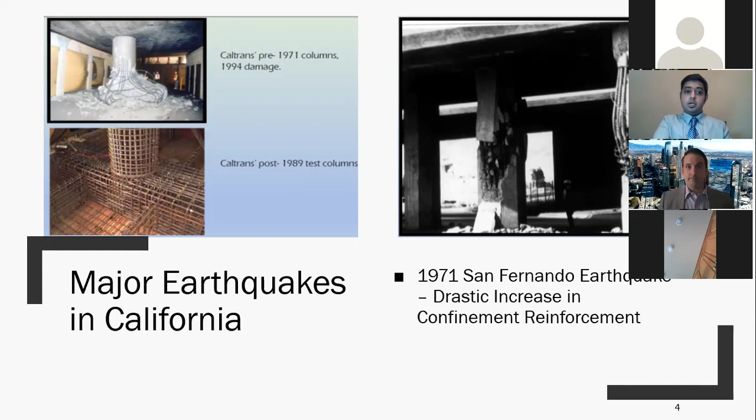The next major earthquake in California was the 1989 Loma Prieta earthquake, which resulted in the collapse of the Bay Bridge and Cypress Viaduct. The main issues brought into consideration during this earthquake were the support widths, especially the hinge support widths or at the abutments, and also better structural framing and continuity for multi-span bridges.

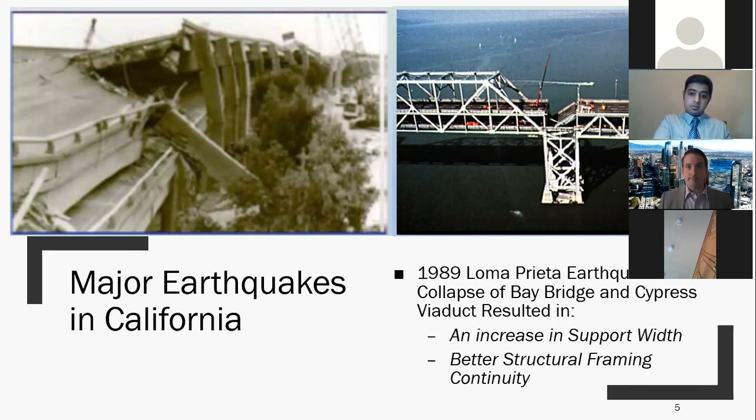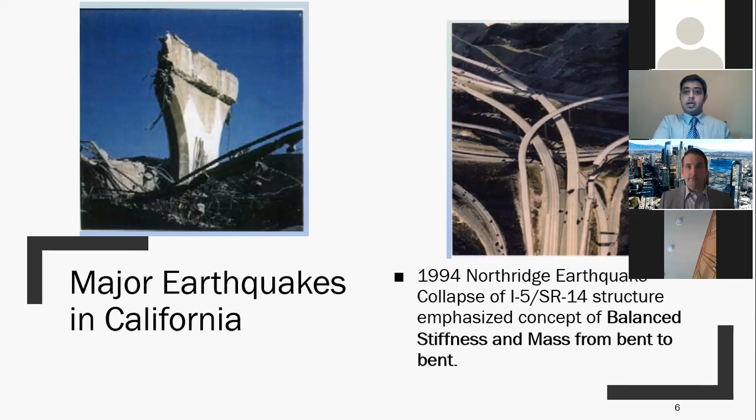Another major earthquake here in Los Angeles was the 1994 Northridge earthquake, which resulted in the collapse of the Route 5 and Route 14 interchange. This was the second time that this interchange had collapsed. I think it had also collapsed in the 1971 earthquake, and it again collapsed. It was reconstructed, and it again collapsed in 1994. This brought into our attention the importance of balanced stiffness and mass from bent to bent and from frame to frame, as you can see here in this picture.

This picture explains it more clearly. Basically, when we are designing new bridges nowadays, we need to balance the stiffness between the columns, adjacent columns within the bent, and adjacent bents within the frame. This is an extremely important point which we learned from the 1994 earthquake.

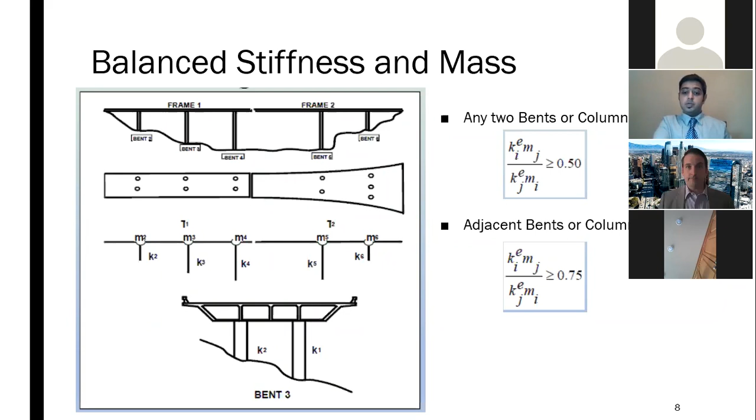So what is Caltrans' Seismic Retrofit Program? This is an ongoing program, and each earthquake has taught us something new. At Caltrans, we have tried to incorporate those things into our bridge design.

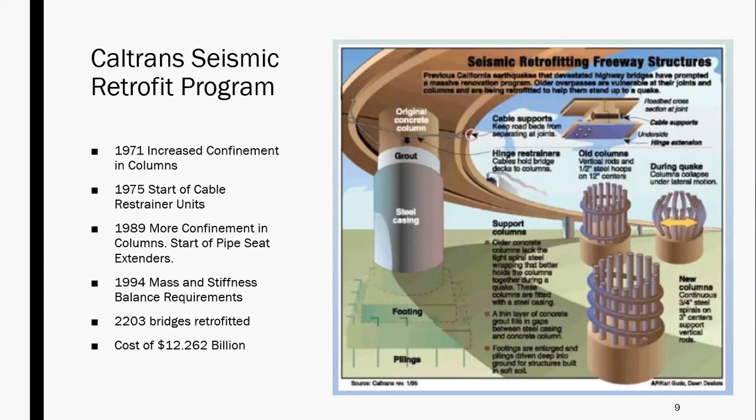So in 1971, we started providing more confinement. In 1975, we started using cable restrainer units. Then in 1989, we again started providing more confinement and using pipe seat extenders. Also, the seat widths, the criteria for at least minimum 24-inch seat widths, came into picture. The '94 earthquake taught us about mass and stiffness balance between adjacent columns and frames for continuous bridges.

Approximately 2,000 bridges have been retrofitted in the past at a cost of $12.262 billion, which is a huge amount. When we are driving on the freeway, we don't really realize how many bridges we cross, especially here in LA, where we have to commute so much.

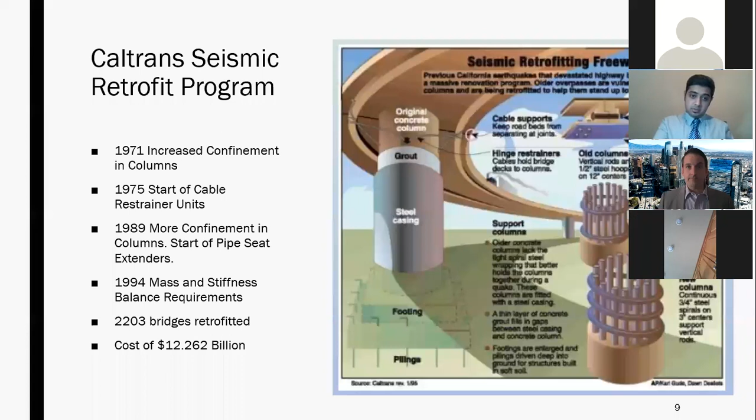Then what is the need for seismic retrofitting? Why are we still seismically retrofitting the bridges? The first and important thing is that past earthquakes dictate the need for seismic retrofitting, like how bridges have performed in the past. Maybe some elements got damaged, so that's why we need to fix them.

Secondly, I think after the 1989 earthquake, during phase one and phase two retrofit programs, more than 2,000 bridges were retrofitted, including single column bent bridges and multi-column bent bridges. Every year we additionally retrofit around 30 plus or minus bridges through widenings and new screenings.

So the reason why we need to retrofit is because our standards are constantly evolving, and as we move forward, we need to make sure that the existing structures, as they are aging, are capable of handling the loads from an earthquake.

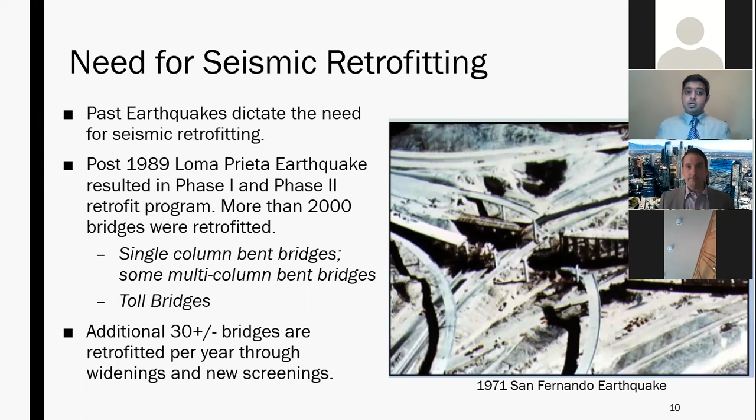Some of the challenges in seismic retrofit programs or projects is the need to identify the design scope early on. Usually in normal projects, we identify the exact scope when we go into the actual design phase. But for seismic retrofit projects, we need to define the scope well before the actual project starts so that we have the allocated funding for the work we need to perform.

Then widening of existing bridges again poses a challenge because now, based on the new memos to designers, I think 20-15, we need to check if the existing bridge is capable of handling all the seismic forces on its own before we widen that bridge, which is something new that Caltrans has introduced.

Seismic hazard maps are constantly changing. USGS is updating the maps, and the trend is moving towards new modern seismic hazard maps. So because of that, maybe some areas which were not seismically severe are now becoming more seismically active.

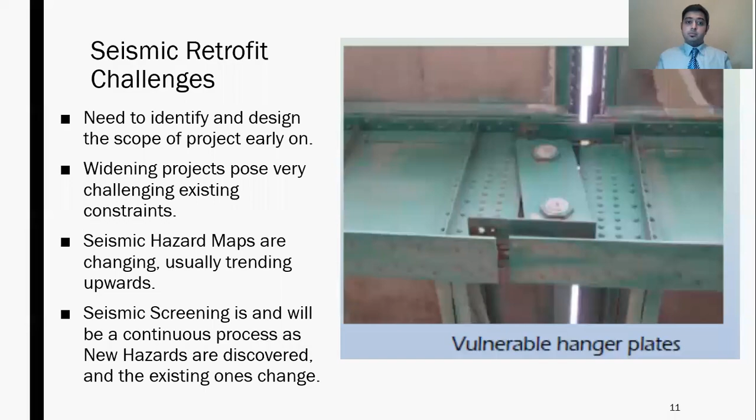So we need to constantly rescreen the bridges in California and identify which bridge needs to be retrofitted. So how do we screen the bridges for seismic retrofitting here at Caltrans? These are some of the list of items which we consider.

The first is if the bridge has the potential for liquefaction and lateral spreading - if the soil, the foundation, will be affected by liquefaction.

Then second, seat widths and cable restrainers. In the past, even though cable restrainers are effective, if they are grouted, they become extremely non-effective - only effective like 10%. So that's a major concern which was brought into our attention.

Then bridges which are crossing active faults, bridges which have increased ground shaking hazards due to updated USGS maps and information, then improvements in seismology, seismic analysis techniques, and bridge retrofit needs, then bridge vulnerabilities not addressed in the previous programs.

For this screening, which happened a couple of years back, initially I think 13,000 bridges were screened, and out of 13,000, approximately 500 structures were identified to be potentially vulnerable to hazards and structural vulnerabilities under an earthquake.

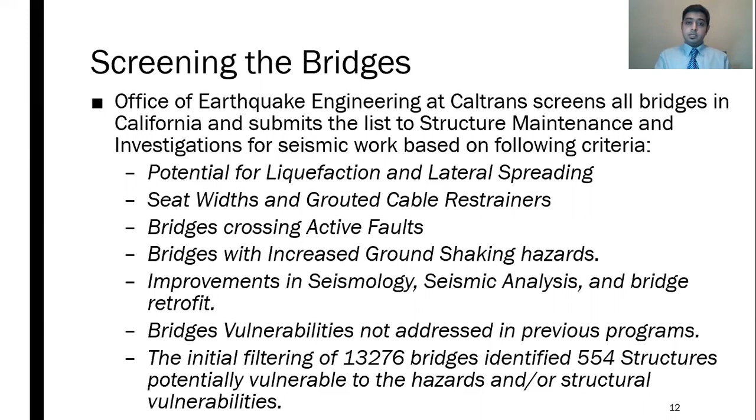Now coming to the actual retrofit part, how do we actually retrofit the bridges? There are multiple ways, and it is also unique to a bridge - how old the bridge is, the as-built plans. There are so many factors which dictate what retrofit strategy you are going to use.

It's a team of engineers working together to come up with the right strategy for retrofitting. It's not just one person's opinion - geotech engineers, earthquake engineers, hydraulics, then district engineers, roadway maintenance engineers. A team of maybe around 20 to 50 people approximately, depending on the scope of the project and how many bridges are involved, will work together to come up with the retrofit strategy.

The main principles which we do in retrofitting the bridges is to reduce mass, then reduce substructure - to retrofit by substructure replacement or additions like adding new foundations, then separating the mass. Column encasing is common, hinge modification like installing cable restrainers or pipe seat extenders, then doing interim retrofits - until a new bridge is constructed, doing a temporary retrofit or retrofit by replacement.

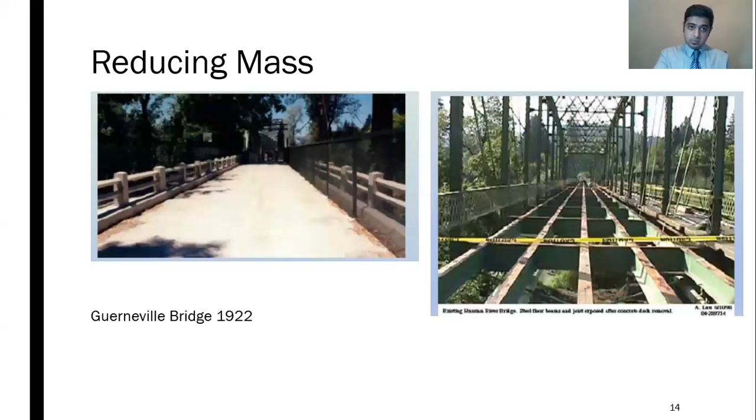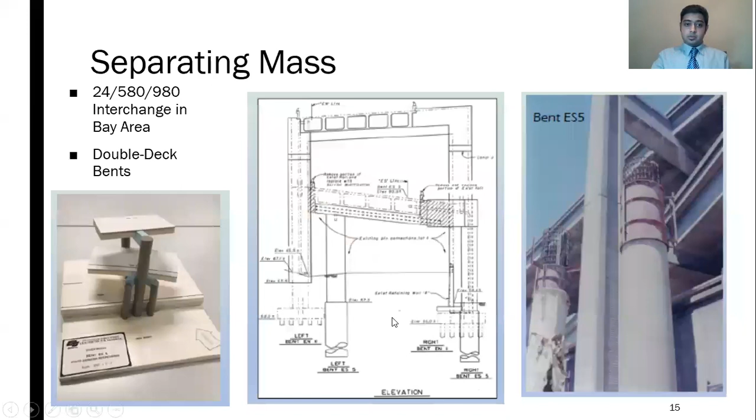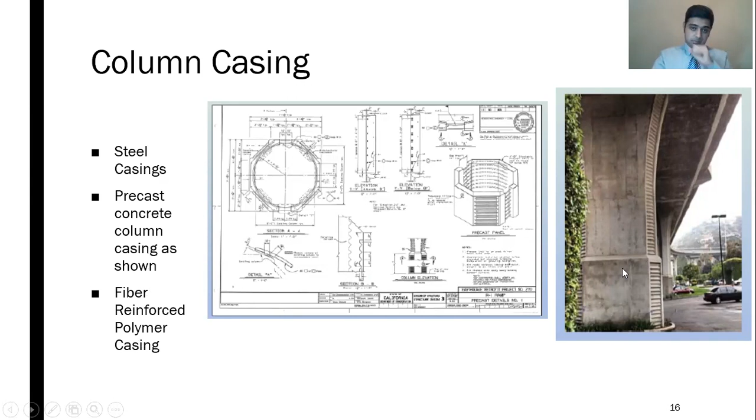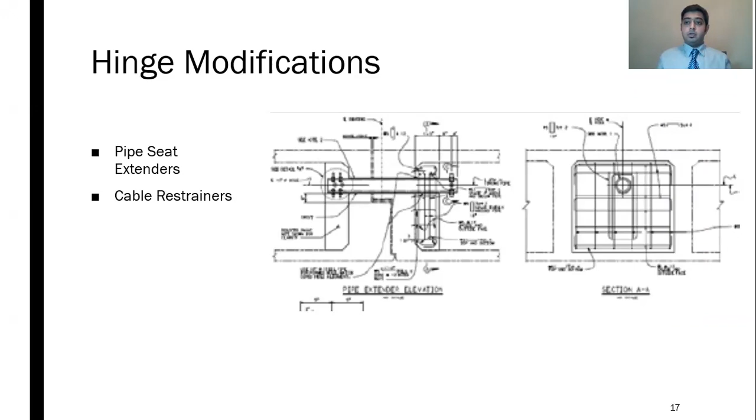So that was a general introduction on what we do for seismic retrofit, the basic seismic retrofit strategies. I'll talk about the projects I'm working on, the bridges I'm currently working on as a bridge engineer doing seismic retrofit.

One thing we look at when doing seismic retrofit is that we need to make sure the demands on the bridge, the displacement demands, are less than the capacities. This means the main principle is to increase the capacity of the bridge elements, and as I shared with you, that can be done by any of these techniques. So we want to increase the capacities and try to reduce the demands.

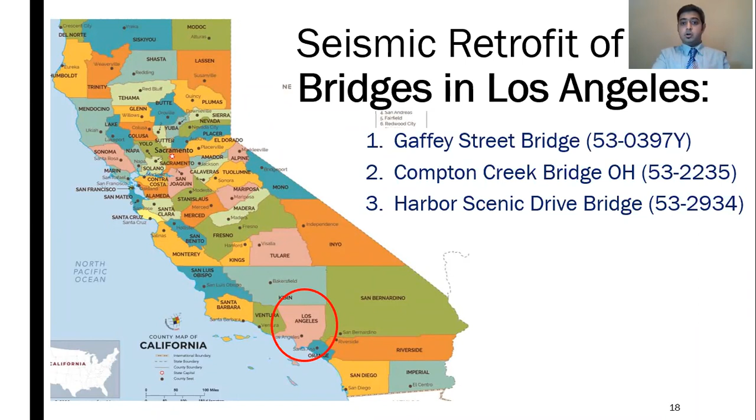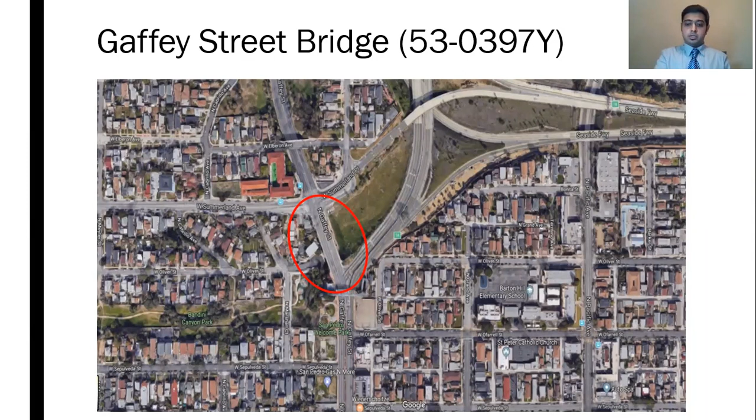First I'll talk about the Gaffey Street Bridge. Maybe many of you have driven on it. This is an old structure—I don't know if you've noticed it. It's located by San Pedro, where we exit off 110 and turn onto Gaffey Street, at the first intersection by the San Pedro sign. This is the first bridge, as you can see in this picture.

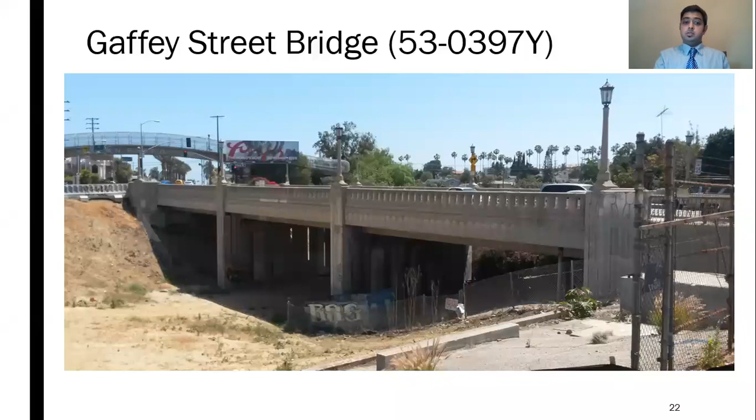This bridge is extremely old—it was built in 1935, and it has been designated a historic bridge. That's why it's extremely critical to retrofit this bridge, and also important not to change its appearance because it is a historic bridge.

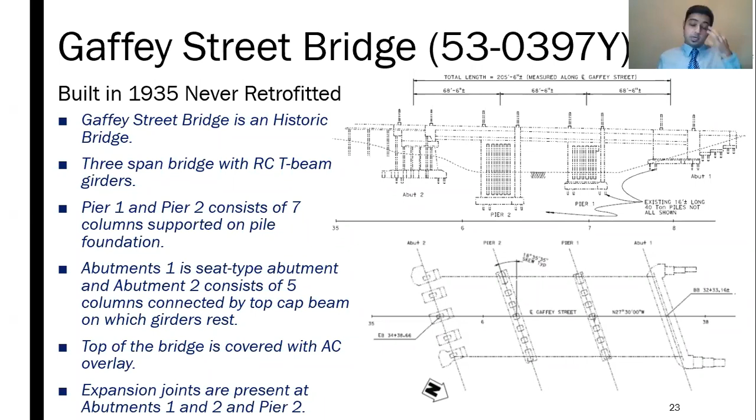In terms of geology and foundation, this bridge is located in a pretty decent soil condition, so it did not have any liquefaction or lateral spreading potential—that was a good thing. The other thing was that the foundation piles were only 40-ton piles, so 40 ton is like 80 kips capacity. And the wing walls are supported on wooden piles with only 20-ton capacity.

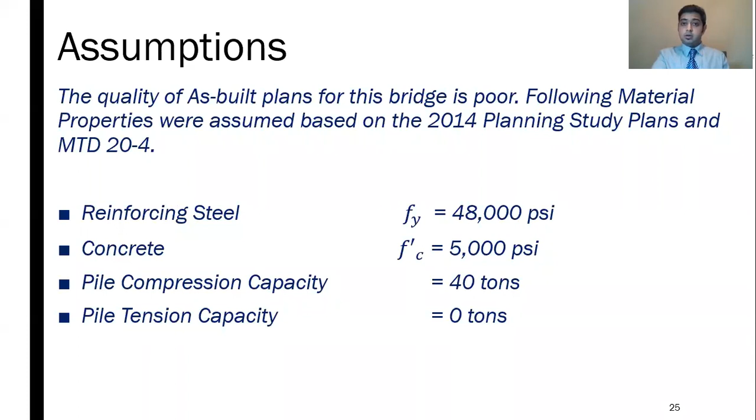The main material properties used for analysis, based on our Caltrans Memos to Designer 20-4 guidelines, are: reinforcing steel Fy equal to 48,000 psi, concrete around 5,000 psi, and the compression capacity of the piles is 40 ton. The tensile capacity of these piles is 0—they cannot handle any tension because these piles are only about 16 feet in length, so they are not deeply embedded in the ground.

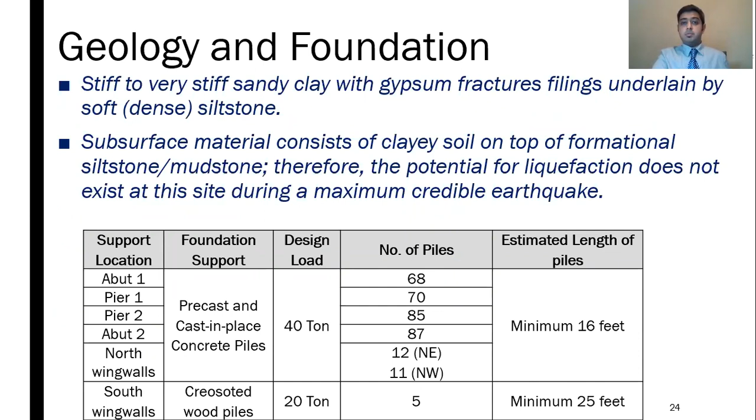So I created a CSI Bridge model. I'm sure a lot of bridge engineers here use CSI Bridge. It is very interesting to play with, and the unique things in creating this model was creating the simply supported spans and creating the expansion joints at Pier 2, which was kind of unique, by using a gap element. So using this model, I performed response spectrum analysis to get the displacement demands.

Based on the SDC 2.0 criteria, I calculated the capacities for these pier columns. We had to make some assumptions in order to model this bridge, because the piers are not exactly a pure wall since they have openings in between. So I modeled it as individual columns.

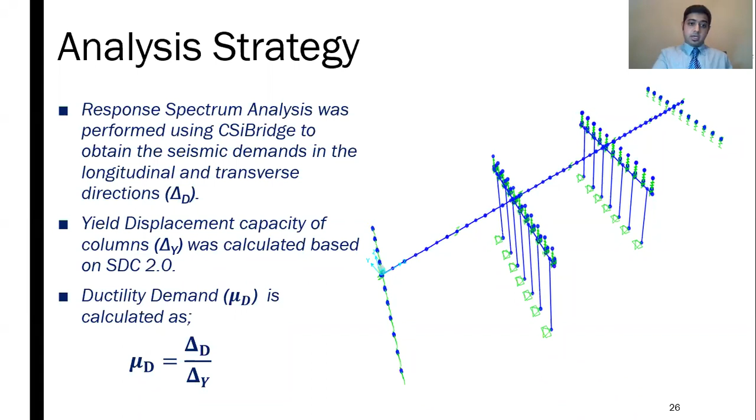So the ductility demand here was calculated as displacement demand over yield displacement capacity. This ductility demand is compared with this chart from Memo to Designer 20-4. In Caltrans, they did a lot of research with universities, and based on their findings, they came up with this table, which tells you what is the maximum allowable ductility capacity, mu C max.

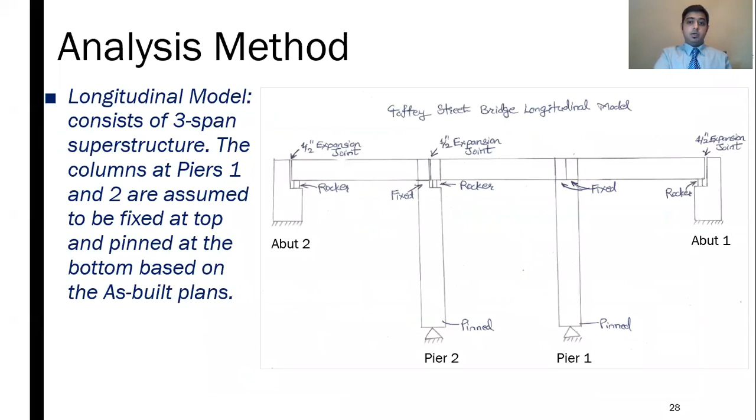So our mu D has to be less than mu C max. In that case, you don't need any seismic retrofit. Well, I'll talk about my results further. This is the longitudinal model, as I explained earlier, where we have an expansion joint in the middle, and this is the transverse model.

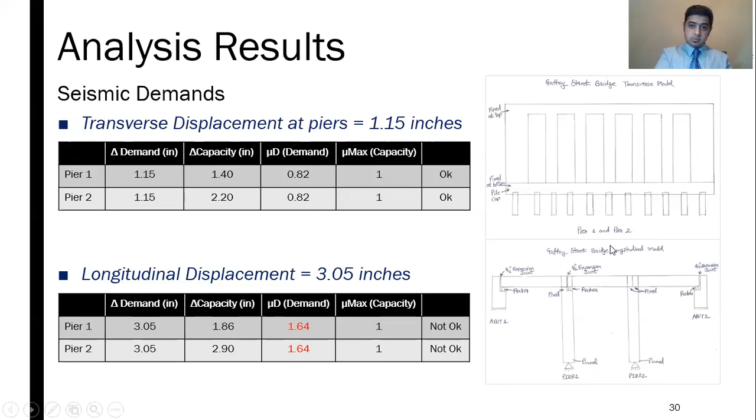Another thing I forgot to mention about this bridge was the quality of the as-built plans. Since this bridge was constructed in 1935, the quality of the as-built plans is very poor. So it was a challenge to identify what type of reinforcement has gone into it, what are the dimensions of the piers. It was extremely challenging and also interesting.

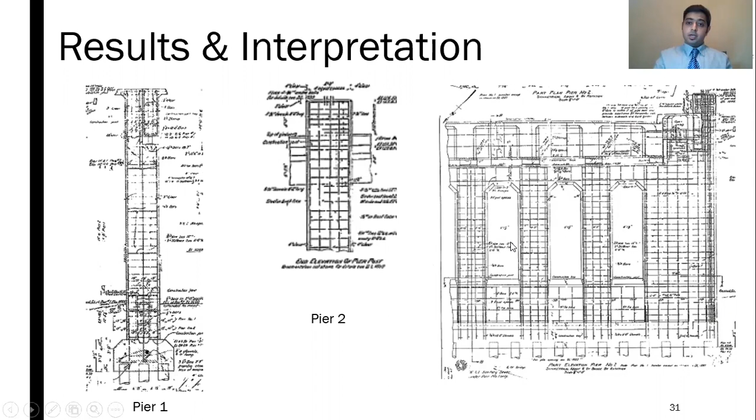Since this is an older bridge, these days we do not allow any longitudinal splicing, but there is some splicing here at the bottom of these piers. I don't know if you can see here in this drawing, but these vertical rebars are spliced, and again the confining reinforcement is also very negligible. Like number 4 is at 18 inches.

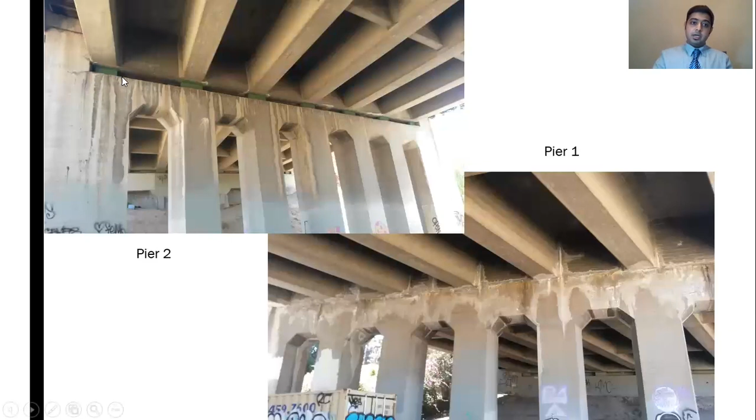This is the picture of the pier walls. You can see that it has 1 foot tall rocker bearings at the middle pier. These are the piles which I mentioned earlier during my presentation.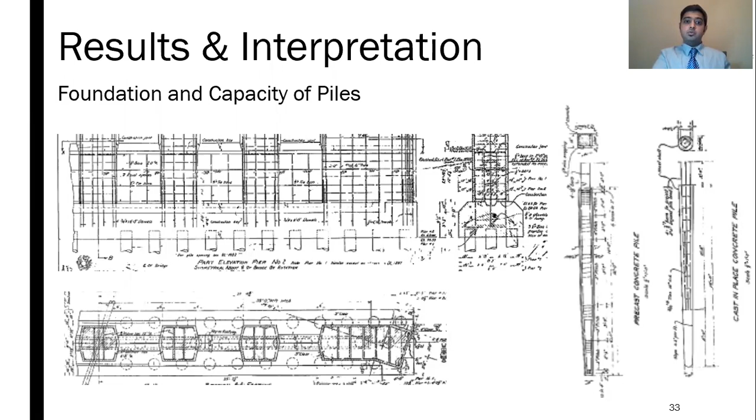Given the geometry of the pier walls, it is extremely difficult to install the steel casing, so we had to come up with a different type of strategy to confine the columns. We decided to install fiber reinforced polymer casing, and we are also going to install carbon fiber anchors to hold this casing in place.

Initially, we were also planning on installing the casing on the outer columns, but since this is a historic bridge, these outer columns have architectural treatments, and it was not allowed to change the look of the bridge. So after doing exhaustive calculations, we were able to determine that just providing the casing on the interior columns, we can still strengthen the bridge and prevent it from collapse.

The main idea behind seismic retrofit is preventing the collapse mechanism from forming, that is preventing plastic hinging from forming. Luckily, the PGA at this site is not that great. It is around 0.58, so it's not a very high ground motion susceptible site.

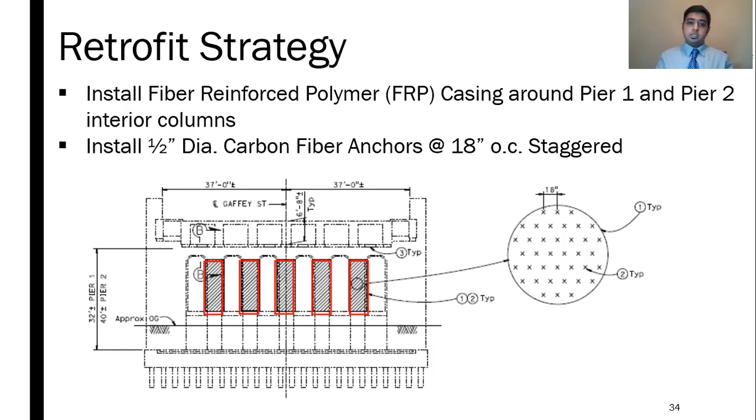Another important aspect we had to consider in our retrofit strategy was the 1 foot tall rocker bearings. 1 foot is a pretty considerable amount of thickness, so in case of longitudinal movement of the bridge, chances are that the spans are going to get unseated from the rocker bearings. So another alternative was to construct catcher blocks, so even if the spans slide on the rocker bearing, they will fall on these catcher blocks instead of falling 1 foot, which would create huge damage.

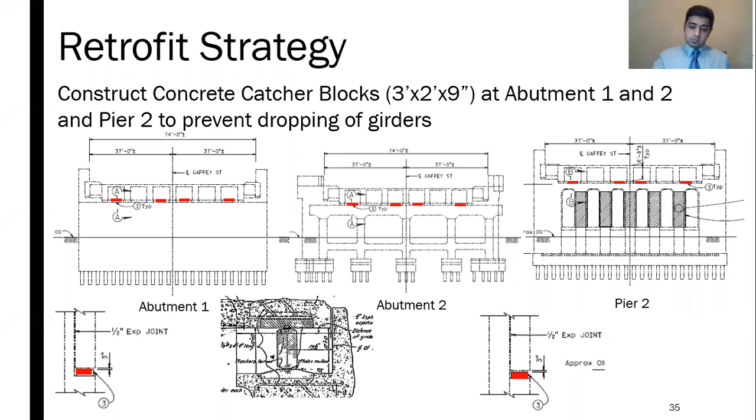So after doing all this analysis and brainstorming what retrofit ideas we are going to do, everything comes down to a price, how much it is going to cost. The approximate cost which we calculated was around $800,000. This project is still ongoing and we are still going on with the final design, so this cost may change.

But the main thing is we want to do the bare minimum possible work to get maximum output, or maximum outcome, out of our retrofitting. That's the main strategy we implement in seismic retrofitting.

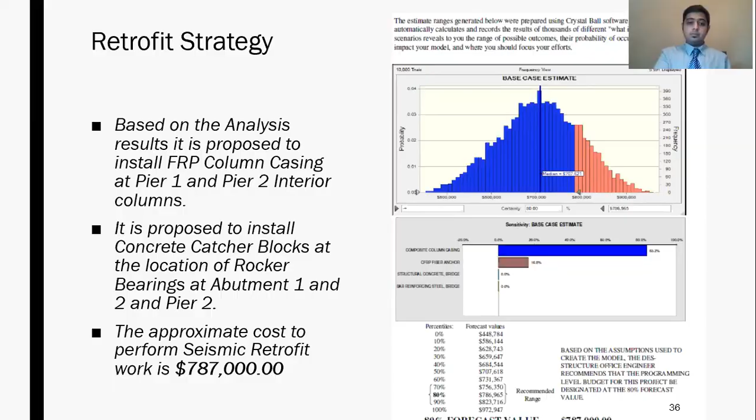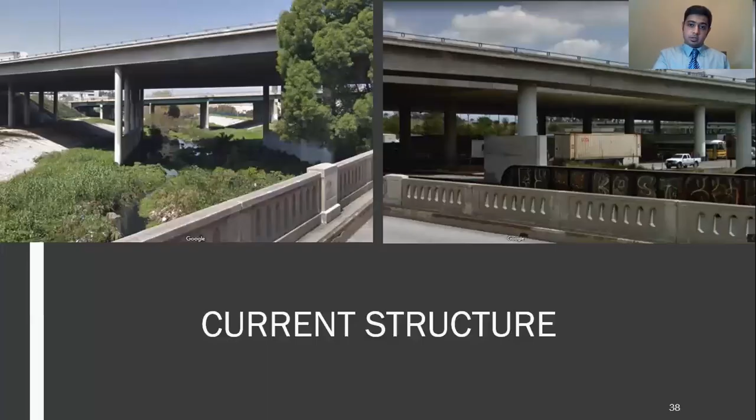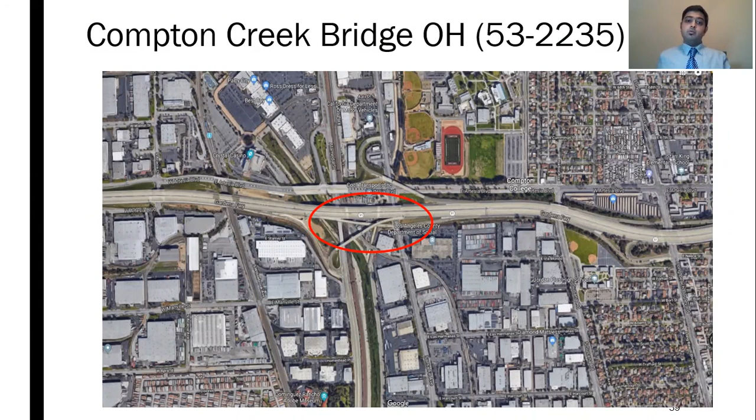So the next bridge I'll talk about is Compton Creek Bridge overhead. All three bridges I'm talking about are part of a single project. This bridge is located on Route 91, and it's a multi-span bridge, pretty long, with Compton Creek passing underneath it, which presents unique challenges.

To give some background, this bridge was built in 1974 and was originally retrofitted in 1996. But as I explained earlier, we've come up with new screening criteria, and this bridge was re-screened by the Office of Earthquake Engineering for seismic retrofitting, so I reanalyzed this bridge.

This bridge consists of a left and right bridge. If you look at the picture, you won't notice it, but the left and right sides are actually separate, divided by a longitudinal joint. These days we don't use longitudinal joints because they become a maintenance issue, but since it was built in '74, it has one.

It's an 11-span bridge on the left side and 10 spans on the right side. The last two spans are pre-stressed concrete, and the remaining spans are cast-in-place reinforced concrete. In 1996, they retrofitted all the bents except bent 2, 3, and bent 4.

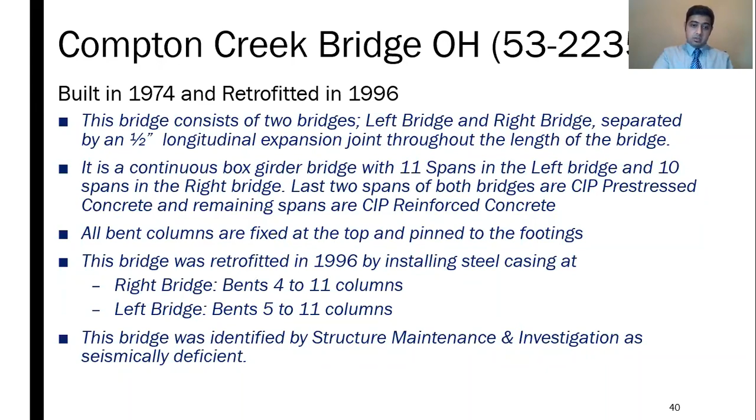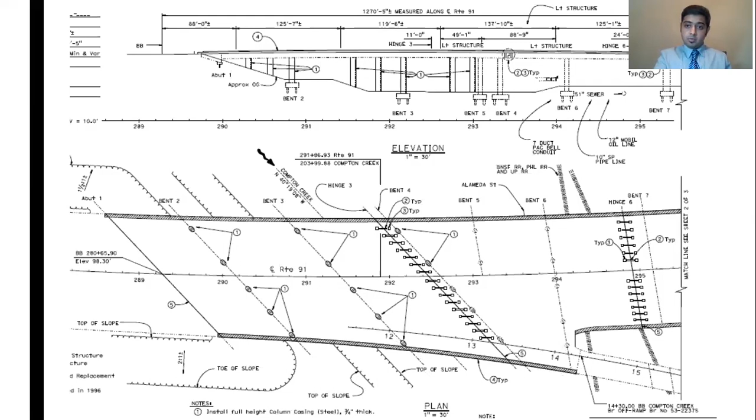Another thing is that this bridge branches off, and there's another bridge which connects to the main bridge at bent 6 - the off-ramp bridge, which branches off from it. Up until bent 6, this off-ramp bridge is also supported by the main structure. There were a lot of complications in modeling this. And there's another on-ramp bridge which joins this bridge at bent 11.

Geology and foundation-wise, this site mainly consists of medium dense silty sand. Originally, this bridge was found to have a potential for liquefaction and lateral spreading. So we did in-depth geotechnical investigations, and based on current standards, Geotech did the liquefaction and lateral spreading analysis, concluding the potential is negligible, so we don't need to retrofit the foundation for that. It took almost a year just to do the geotechnical investigations and analyses.

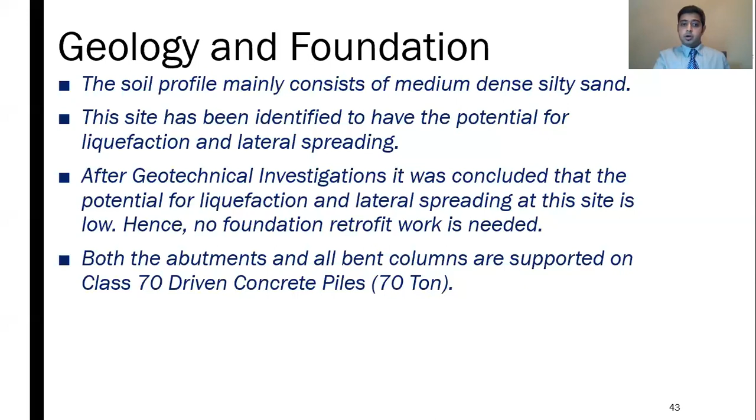Both the abutments and all the bent columns are supported on class 70 driven concrete piles - that's 70 ton, or 140 kips. Regarding material properties, since this is a newer bridge compared to the Gaffey Street bridge, the steel in the existing structure has a yield strength of 66 ksi, and the concrete is 5,000 psi. All the columns are fixed at top and pinned at bottom.

In order to analyze this bridge, I modeled it using CSI Bridge. Along this blue central line, I had to place an expansion gap element to allow for the expansion joint between each bent. That was very intricate and challenging to do, and it took me some time to generate this model.

It's extremely important to have a realistic model of the bridge, because any errors in the model may cause you to underestimate or overestimate the bridge's capacities. At Caltrans, it's extremely important for us to have an accurate model, and we support it with independent checks and hand calculations to get a good idea about our model rather than just relying on the computer.

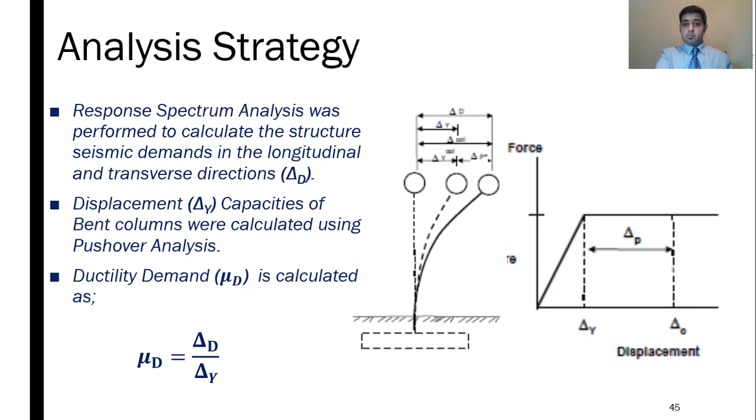To calculate the capacities, we had to do a pushover analysis on each bent. We did pushover analyses on all 10 bents, and there are 4 frames, so we had to do pushover on each frame in the longitudinal direction. There were multiple pushovers to calculate the capacities.

Again, the criteria was to compare the ductility demand with the allowable ductility capacity, that is 3 in this case, because these columns are much better than what I showed you for Gaffey Street.

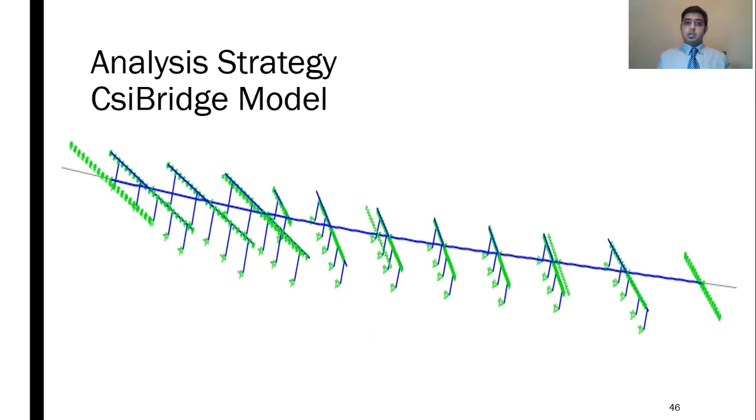Based on my analysis, I found that hinge 3 and hinge 6 have demands of around 20 inches, and the hinge seat widths are only 15 inches wide. This means that in case of an earthquake, if these 2 frames move in the opposite direction, they are likely to separate, and the frame sitting on the other frame is going to fall off. So the strategy was to install pipe seat extenders at hinge 3 and hinge 6.

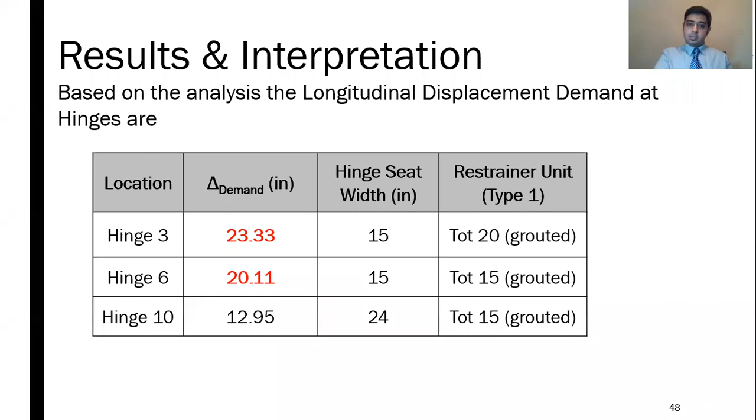Hinge 10 was good - the demand was less than the hinge seat width, so we didn't have to do anything there. You can see these are the old hinge details for hinge 3 and 6, with 7 inches and 8 inches of hinge seat, and this other hinge is around 24 inches, 2 feet wide.

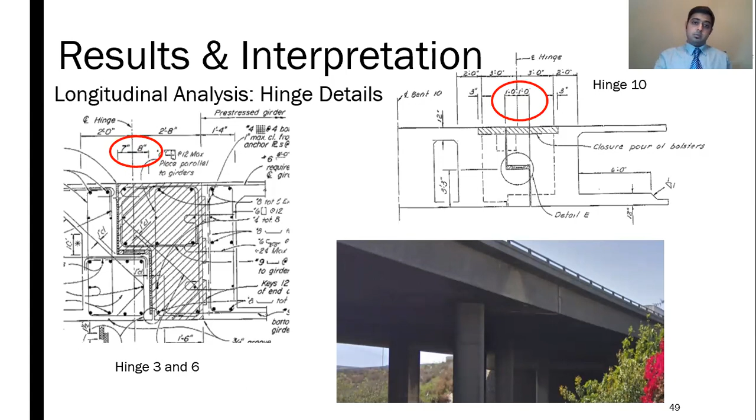Nowadays, when we construct new bridges, the minimum hinge seat criteria is 30 inches based on SDC 2.0, and SDC 1.7 had a criteria of, I believe, 24 inches. That's not the ultimate criteria, just the minimum. The hinge seats are also dictated by how much longitudinal displacement you anticipate at your structure, plus thermal movements and any shrinkage or pre-stressing effects. All these things come into picture when we calculate hinge seat widths based on our current standards.

So the retrofit strategy is to install pipe seat extenders. Installing pipe seat extenders is extremely challenging because you have to go from underneath - I'll go on to the next slide - you have to basically go to the location where the hinge is.

In this case, we have a railroad right above, right below our hinge location. So you have to create soffit openings from both sides to go inside the cell and then put in this pipe - drill across the hinge avoiding any reinforcement - and then construct bolsters at both ends to secure the pipes properly. It's a very cumbersome job, but it needs to be done to ensure this bridge is safe.

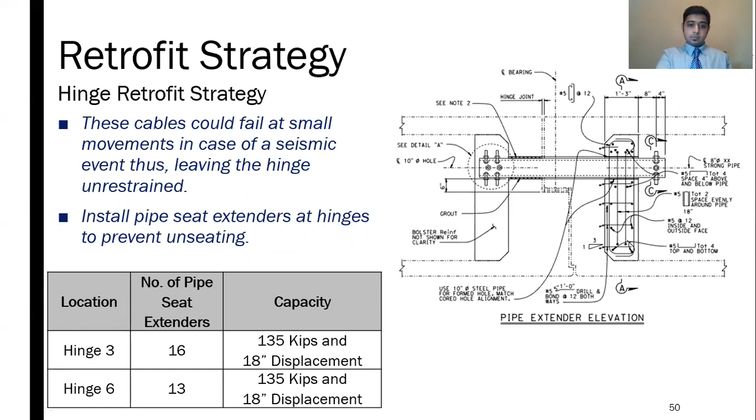The second thing was, earlier I mentioned we also did pushover analyses on our bridge bents. Based on the pushover analysis, it was found that bent 2, bent 3, and bent 4, which were not retrofitted in the past, had demands greater than the capacities, which means they needed to be retrofitted.

I'm not sure why they did not retrofit these bents - maybe because of the creek which was present here in the past. But it clearly indicated that we had to retrofit these bents based on our analysis results.

So it was proposed to install a regular standard steel casing. Installing steel casing bumps up the allowable capacity values to 8 instead of 3 without any casing. This gives the columns more ductility - in case of a strong earthquake, they will displace more, the plastic hinging will be delayed, and that gives them more capacity.

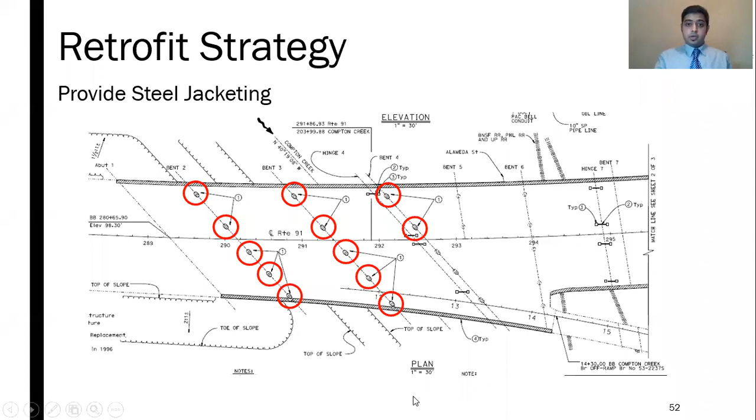So you can see here, these are the bent columns which we are going to retrofit by installing column casing. Another unique thing is these two bents are within the Compton Creek area.

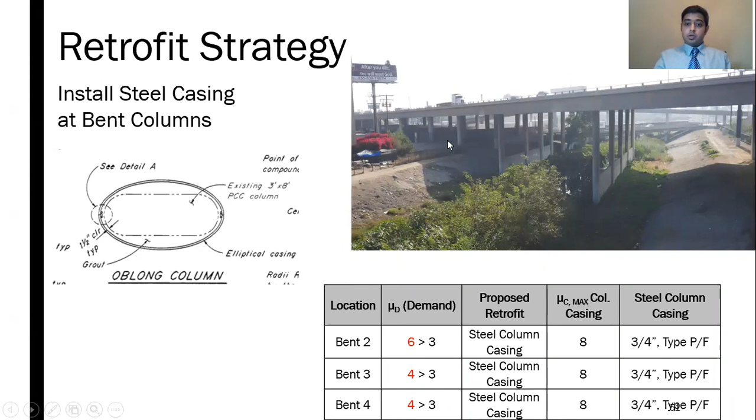We have to excavate, do some water diversion, get permits from the concerned parties, and for installing the pipe seat extenders, we have to work with railroad companies. This is a typical section view of how the column casings are going to be installed.

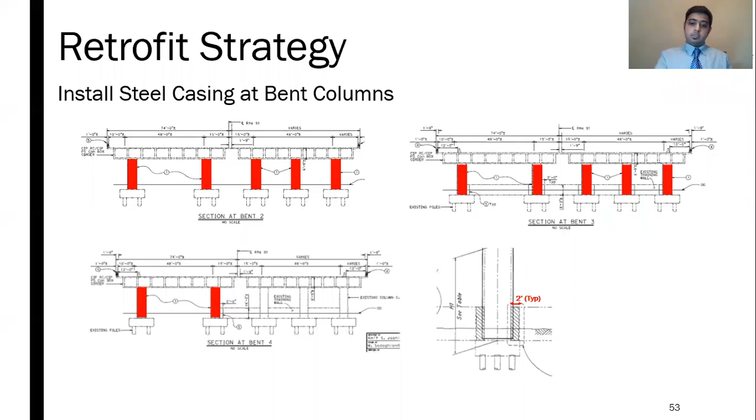The cost for this project is significantly higher because this bridge itself is huge, and the amount of work we are doing is enormous. So it's around 4.8 million. This may change because we are still in the actual design phase, and as we move on it will definitely change a little bit, not drastically, but it will be interesting to know.

It becomes a huge challenge to work above any water bodies. We need to get so many permits and we have to prevent debris from falling inside.

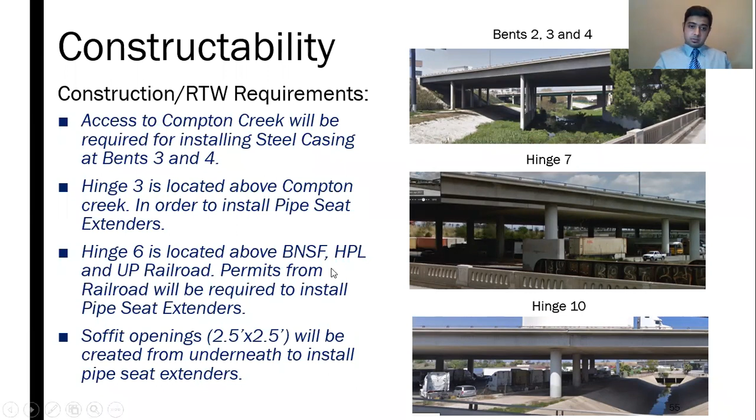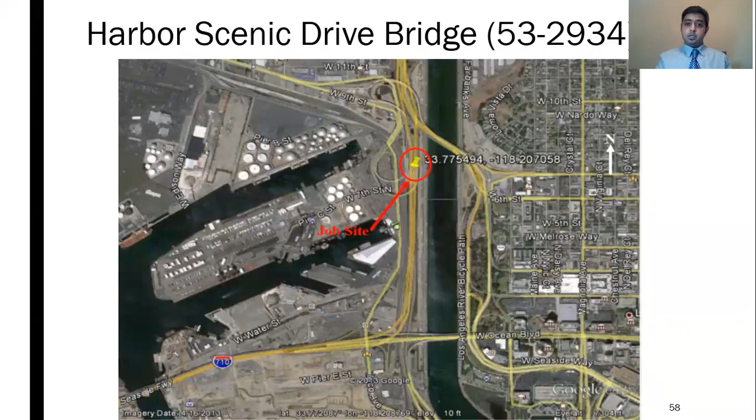The third bridge which I'm working on is Harbor Scenic Drive Bridge. This bridge is also very interesting structurally, and I'll share with you guys shortly. This is located around the Long Beach port area, and this area has soil which is prone to liquefaction and lateral spreading. So we had to do a lot of geotechnical investigations here.

Originally this bridge belonged to, I think, Port of Long Beach, and it was relinquished to Caltrans probably sometime in the 80s or early 90s. They had retrofitted this bridge in 94 by installing partial height casings and full height casings, and the foundations of some of the columns were retrofitted by installing a top reinforcement mat for 16 columns.

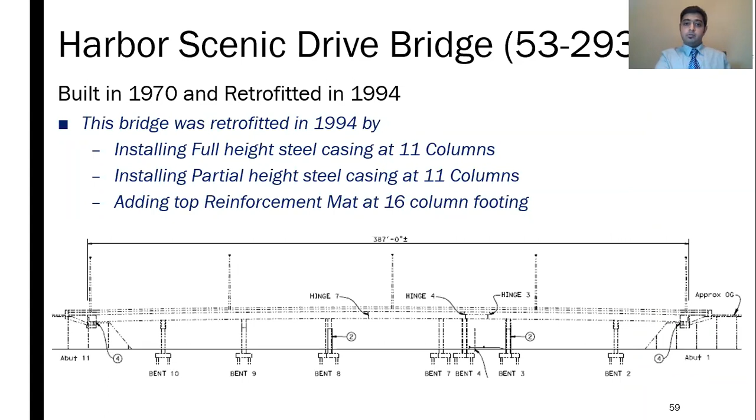The soil mainly consists of soft silt with interbeds of clay, and as I mentioned, this had a potential for liquefaction. Geotechnical investigations took almost a year. After the investigations and lateral spreading analysis and liquefaction analysis, a team of engineers decided that the potential exists but is negligible, and it won't significantly damage the bridge.

So the piles are embedded deep enough, they penetrate below the liquefiable layers of soil, which was a good thing, and they would still retain enough capacity.

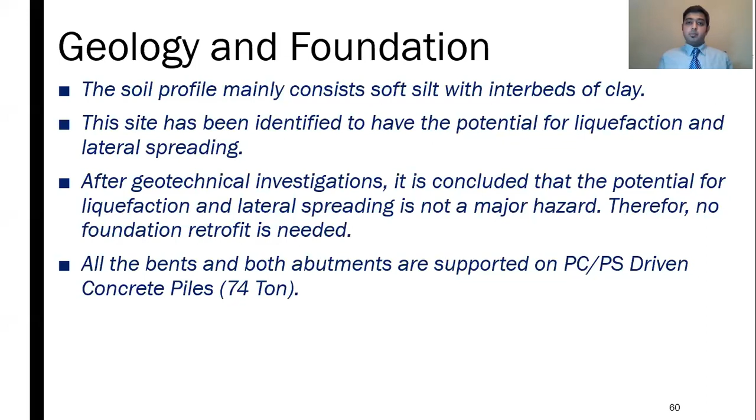Again, the material properties which we used for this bridge are 48,000 psi, and concrete is 4500 psi. All columns at bents are fixed at top and pinned at bottom, and a plastic hinge is expected to be formed at the top of the column.

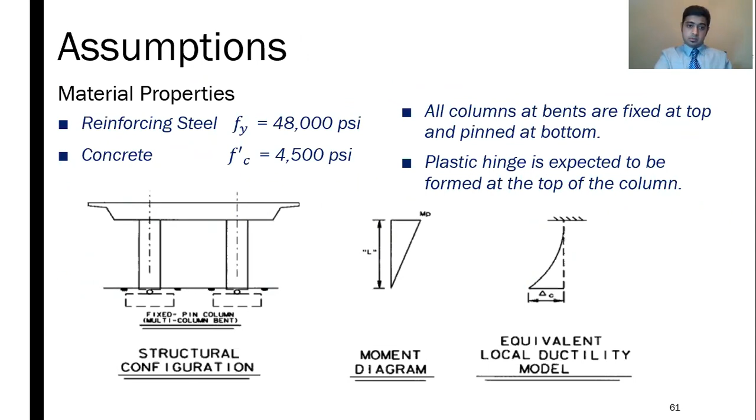To model this thing in CSI Bridge was extremely challenging. The main thing was we actually generated an Excel file with all the coordinates of each bridge column, and that's how we modeled it, not by using the direct interface which CSI Bridge offers. We had to go the back route where we change the coordinates and put the elements and everything in an Excel file and then extract our model. This was an interesting task to do.

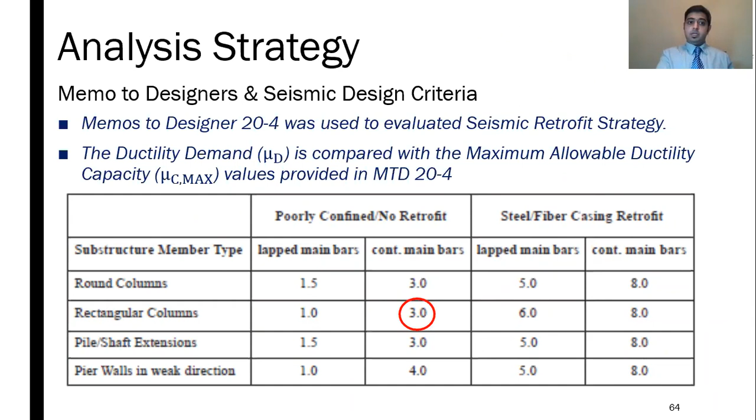At hinge 8, they had previously retrofitted by installing strong pipes, basically pipe seat extenders, with an allowable displacement of around 8 inches, while our demand was around 12 inches. So it was decided that it's reasonable - even in the worst case, these pipes won't completely break off, though the end plates may break off. So it was decided we don't have to do any hinge retrofit there, given that the original retrofit in place is acting pretty good.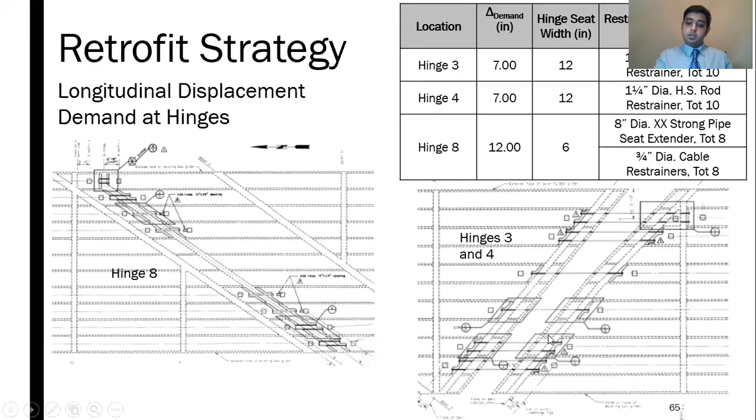This was not just done by me, but by a team of engineers. I was the main project engineer, and a team of other engineers helped me do this analysis. Each model, or each bridge strategy, is independently checked by another engineer to make sure that person hasn't missed anything. Especially in this kind of complex bridge, it is extremely important that we consider that.

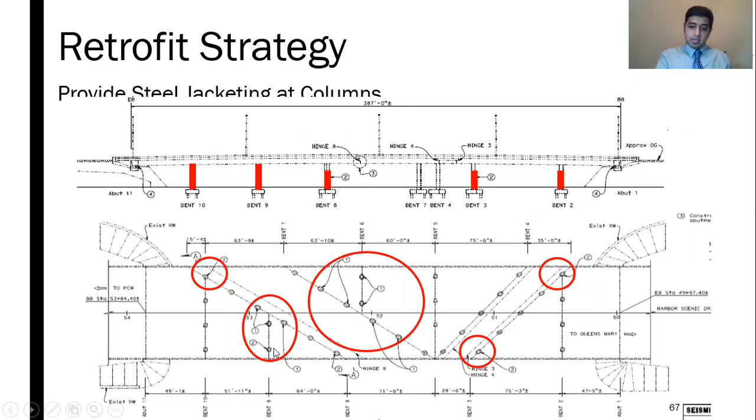At the end, it was decided to provide steel casing. Some of the columns were already partially encased - I don't think you can see it from here - and some columns were fully encased, and some were not encased at all. So here you can see these are the columns which were partially encased, and these are the columns which were fully encased.

In our strategy, we decided based on our results to encase some of these columns which were not retrofitted in the past. We don't really do partial column encasing - I'm not sure what the idea was when they did this, because this wasn't done by Caltrans. It was done, I believe, by LA County or LA City back then.

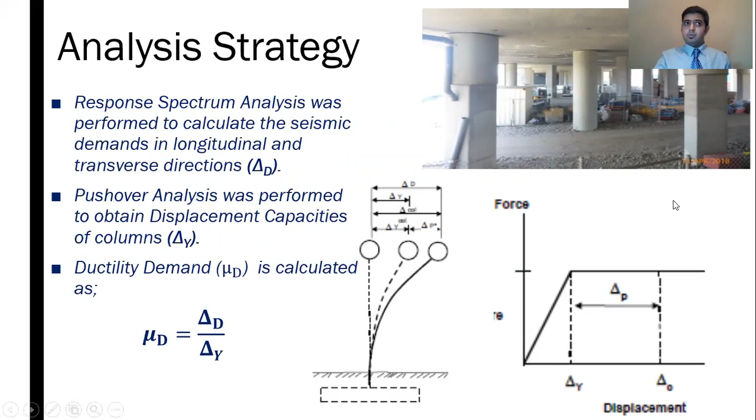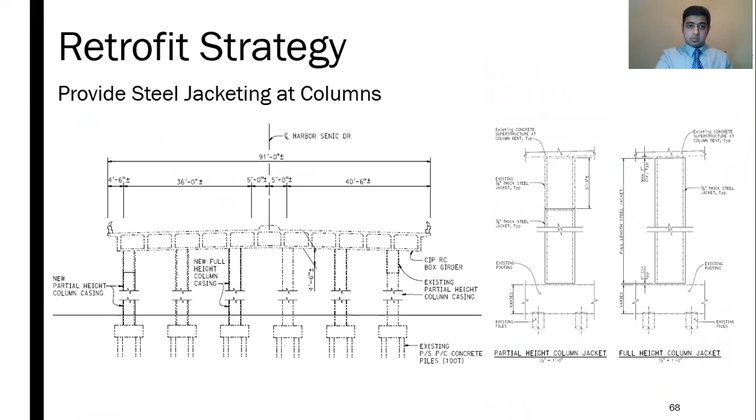Another aspect of this bridge is that at the abutments we have these 6-inch tall rocker bearings. For Gaffey Street we had 1-foot tall rocker bearings, but here they're only 6 inches. Still, the chances of the bridge deck dropping off are considerably high.

So we decided - the abutments here are not a continuous abutment, they have pedestals - to have catcher blocks for these abutment seats as well, to prevent sudden dropping by 6 inches. Because if you look at the total bridge deck, it's a huge mass of concrete, so even if 6 inches looks really small, it's still a huge impact and can considerably damage the structure.

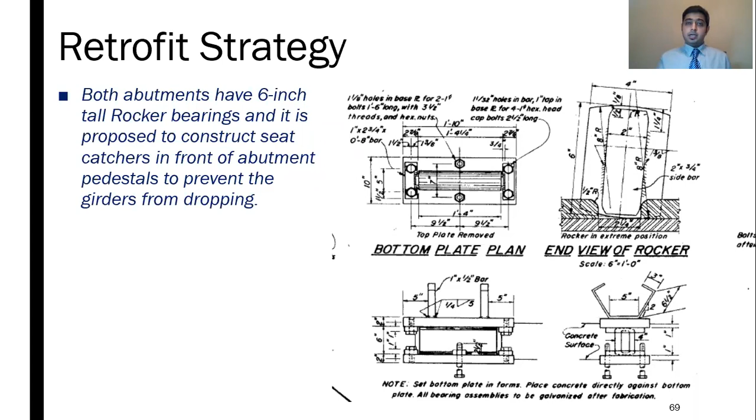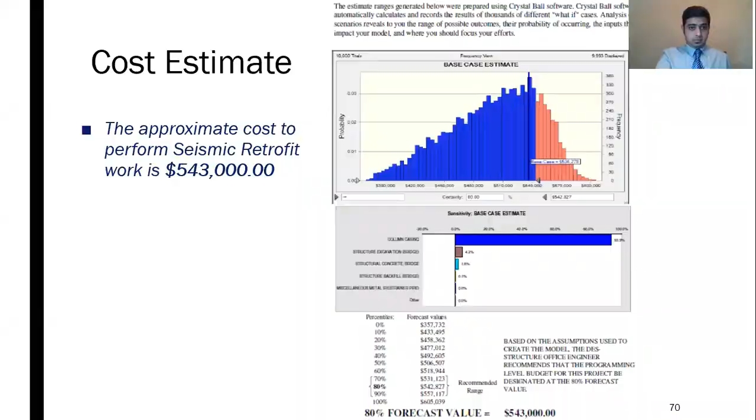The cost for retrofitting this bridge was around $550,000. This may change a little depending on the actual final design. The total cost estimate for these 3 bridges came to around $6 million, which is pretty good. I think if you had to replace these bridges individually, it would cost way more than 6 million, and these bridges aren't old enough that we need to replace them.

So when we come up with a seismic retrofit strategy, we have to have strong reasoning - why we want to retrofit it, whether we can replace it instead, and if we don't want to retrofit and want to replace it, we need to be able to prove to the project manager or the funding authority why we want to do that.

For Gaffey Street Bridge, since it's an older bridge but also a historic bridge, it would have been better if we replaced it. But there are so many clearances that we couldn't justify why we need to replace it. If we can justify that our retrofit strategy will prevent the bridge from collapse, we cannot just go and replace any bridge. We have to first do every single possible thing, and only if that's not possible do we go to replacing the bridge.

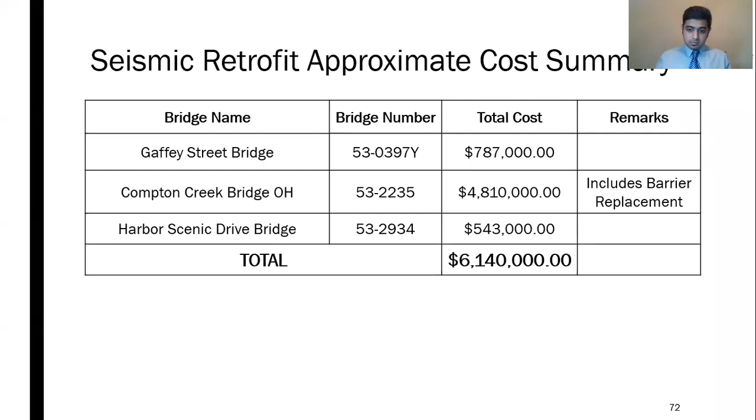I'm not sure how we are doing on time. Dana, do we have enough time? So we are about time, but I think we can still squeeze in a couple of questions.

There were a couple of questions from Chris. He asked, when Caltrans does a retrofit, do you install any sensors on the bridge that can provide real-time data during an earthquake? And does Caltrans use any drones to assist with bridge inspections?

Regarding the sensors, yes, we usually install sensors on new bridges to see how they perform, and also on some toll bridges, especially in the Bay Area, which are unique bridges. When we did seismic retrofitting on those toll bridges, we definitely installed sensors. Here in LA, on some historic bridges, we have installed sensors. I believe on Gaffey Street also we will install sensors to capture how much the bridge is going to displace. We always like to do that.

On one of my projects, the Tex Wash bridge replacement in the desert on I-10, which happened about 5 years back, we installed a couple of sensors to monitor the behavior of the bridge.